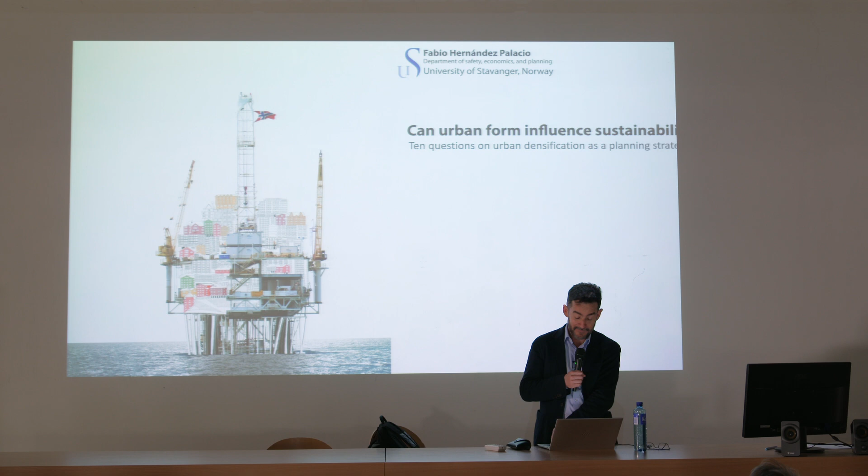So I want to address these 10 points. Of course, for architects, thinking in the large scale, the scale of the cities, sometimes some architects just work in the architectural scale and they do not reflect on the larger scale and the challenges that the urban form creates for societies. But other architects like myself, I moved gradually from architecture to urbanism. And urban form, of course, is something that I discovered is very influential and very crucial for the quality of life and for the sustainability of societies. And one of the most well-established approaches to address the sustainable city is this policy called urban densification.

Then I would like to start by defining what is urban densification, then why urban densification, what can be the negative effects of urban densification, how do we arrive at sprawled urban regions, what are the costs of sprawl of these very spread cities, what are the common approaches to implementing densification strategies, what are the main barriers to effective densification strategy,

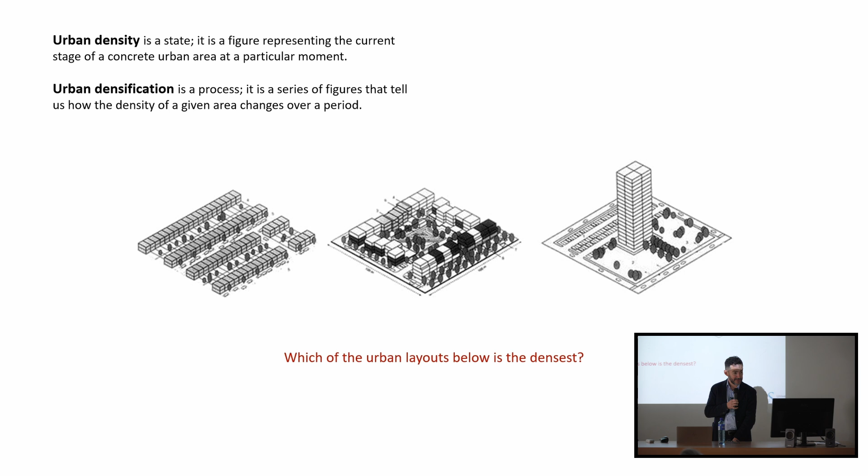Here, this is a question that I always put to my students. Of course, they are people who are starting in urban design, and they do not understand very well the concept of density. And then the question is, of course, which of those urban layouts is the densest? And of course, you know the answer because you are familiar. But people tend to relate high density with high rise, which is not the case. And then it creates many problems and many miscommunications and many challenges for city planners. But the point here is that all of those three layouts have exactly the same density.

And then I also want to call attention to the difference between the word densification, which is the process of making cities more dense, and the term density, which is a measurement. So like here, there are many measurements of density. One very common is people per area or dwellings per hectare or whatever area we have.

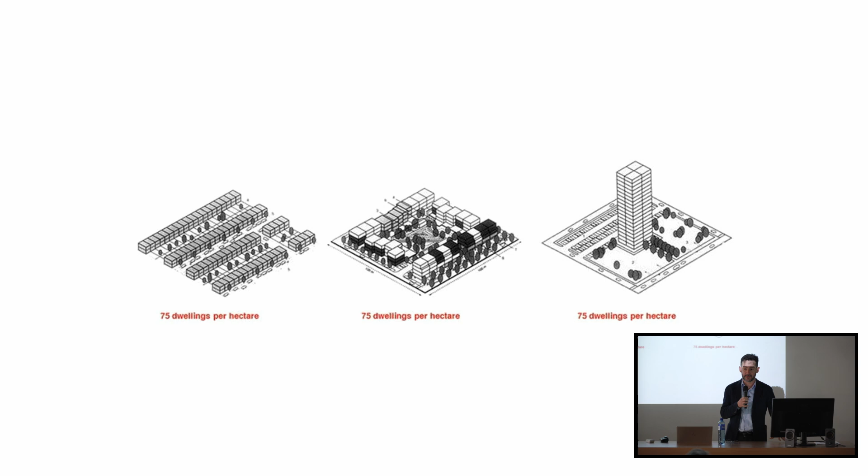And of course, concentrating activities and infrastructures can be achieved in two ways. The first is by building more in the same area, and the second is by concentrating more people on the same land surface. Densification occurs more frequently by combining both larger built surfaces to support greater concentration of people and activities. But how to understand that? We have concentration of people, but also we have concentration of built stocks.

A very common exercise: if you go back in history in Krakow, probably you will discover that 200 or 300 years ago, the amount of people living in the old town of Krakow was probably 2 or 3 times larger than today, because families were larger, they used to live more crowded, but now people have more spacious apartments and so on. So the built density is the same, but the amount of people living in those areas is less. So there are those double aspects of density.

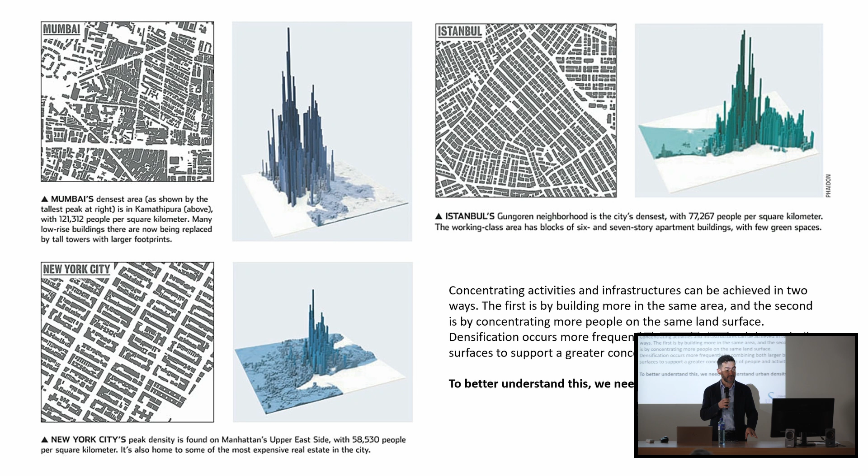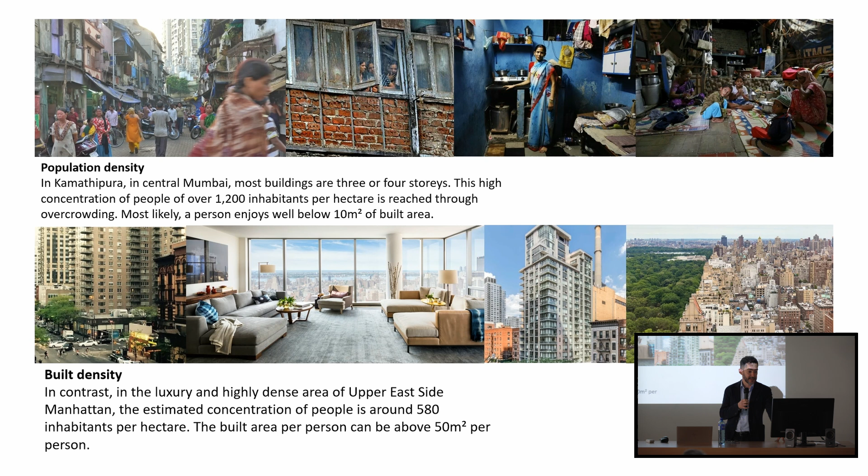So here I bring two examples, because people misinterpret both ideas of the concentration of built stock and the concentration of people. For instance, this neighborhood in Mumbai, Kamathipura, is one of the densest areas in India, and it concentrates around 1,200 inhabitants per hectare. And people just enjoy about 10 square meters per person of roof area.

On the other side, we have very luxurious apartments in Manhattan with, of course, also very high density, but people enjoy their 50 square meters of built area per person. And the density is, of course, about half, 580 inhabitants per hectare.

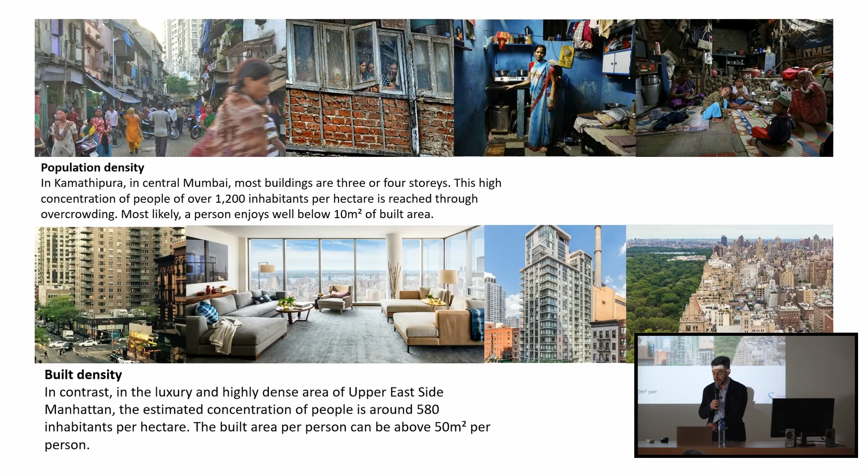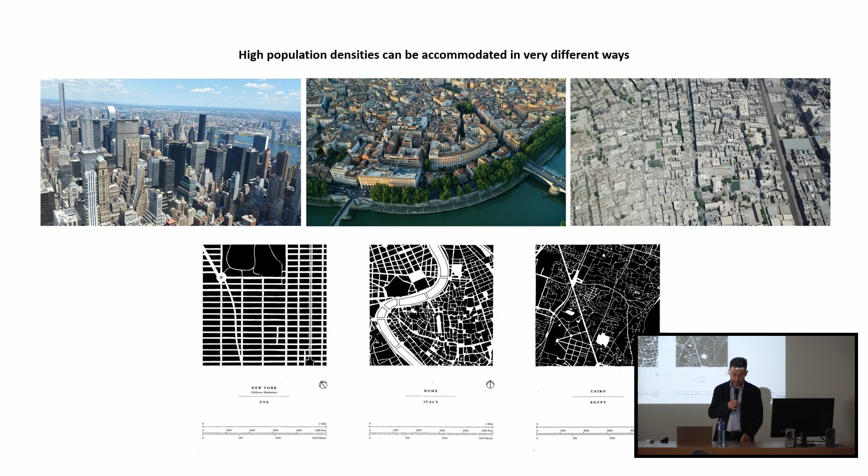One of the concerns as well is that density is a factor that can impact quality of life, and indeed, density can be problematic, especially very high densities. However, we urban designers defend the idea that it is possible to accommodate quite high densities with good quality. So it is a question of design.

So we have also the question of how much density is good. Is there a threshold in which we can say there is a good density and beyond that is problematic, or below that is too little? And of course, it's not really a clear standard. It's kind of a threshold, and of course, it's very much cultural as well.

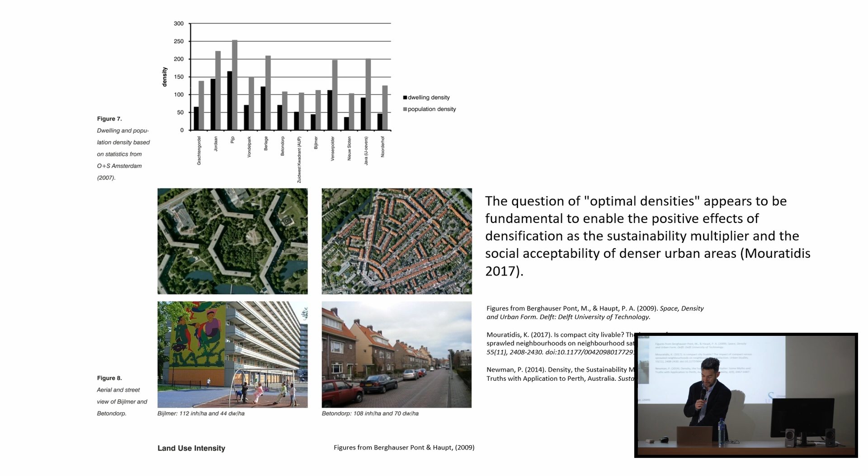So now we go to the second one: why urban densification? Well, the question about urban densification actually started in the late 1980s with this study. This is a study by Newman and Kenworthy in 1989. Those are some Australian transport planners.

And this became very famous because they made a global comparison measuring the amount of gasoline or fuel per capita and compared that with urban density. And of course, they found that very high density cities like Hong Kong were very efficient in the use of fuel. They don't need much fuel because people can walk everywhere, or they can use the metro. But in the other extreme is Houston in Texas, where people need to use the car to go everywhere because the city is very, very sprawl.

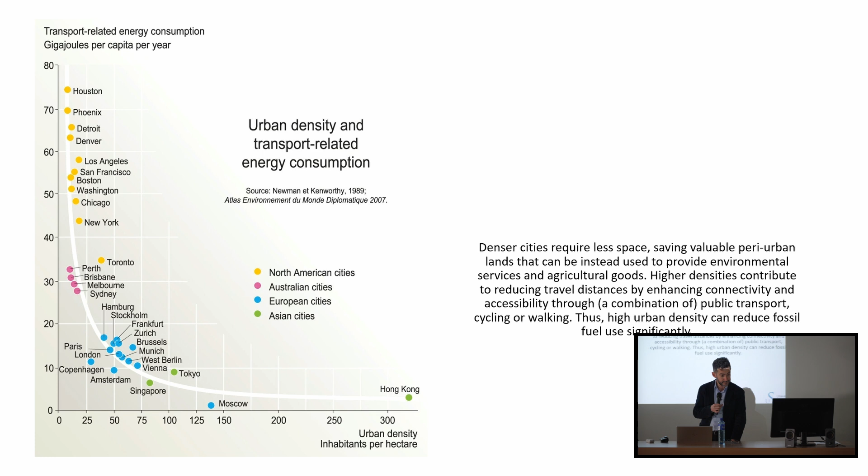So from this study, a very powerful movement starts to plan for more compact cities. And probably you are familiar with a lot of literature and studies, especially in the 1990s and early 2000s, about the compact city. And of course, it has been an issue not only in Norway, also in the Nordics, in Europe and beyond.

So how to reduce CO2 emissions—compact cities and more compact buildings also require less energy for cooling and heating because they have less exposed surfaces. Dwellings also tend to be smaller, meaning lower energy consumption, easier to provide by renewable sources. Also, another benefit from densification is avoiding the expansion of urban development on agricultural lands. That is very important, especially in countries like Norway, in which only 2% of the land surface is suitable for agriculture.

And of course, there are many economic reasons to think that density is good. Dense urban environments provide the conditions to reduce and improve supply chain coordination, leading to better logistic distribution of goods and services—services like post, delivering food to supermarkets, to grocery shops, collecting trash, etc., in a more effective way. Concentrating the users leads to optimization of the use of infrastructure such as electricity grids, water pipes, and street networks. Thus, operating services is cheaper.

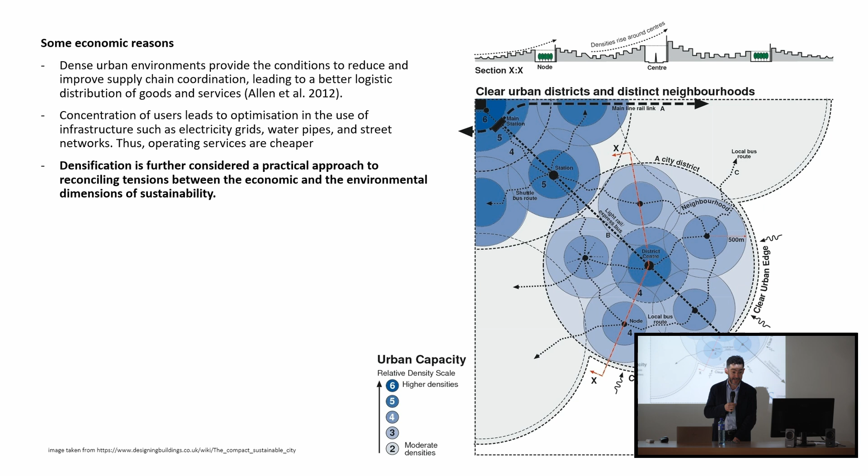Some social reasons for densification and for density are: compact cities contribute to a vibrant public realm. Some people find that problematic because they find the areas noisy sometimes. But also concentrating people and activities enhances the possibilities to access diverse and affordable services within shorter distances. So probably you are familiar with the concept of the 15-minute cities—that's only possible to do in compact areas.

Denser built environments improve creativity and innovation by attracting human talent to regions where they can access an exciting urban life atmosphere. You're probably familiar with the work of an academic urbanist called Richard Florida, who writes about the creative class city. He maintains that compact urban environments in the United States attract younger people, more talent, because these people enjoy urban life more, and thus it is possible to enhance the creativity of cities with these types of environments.

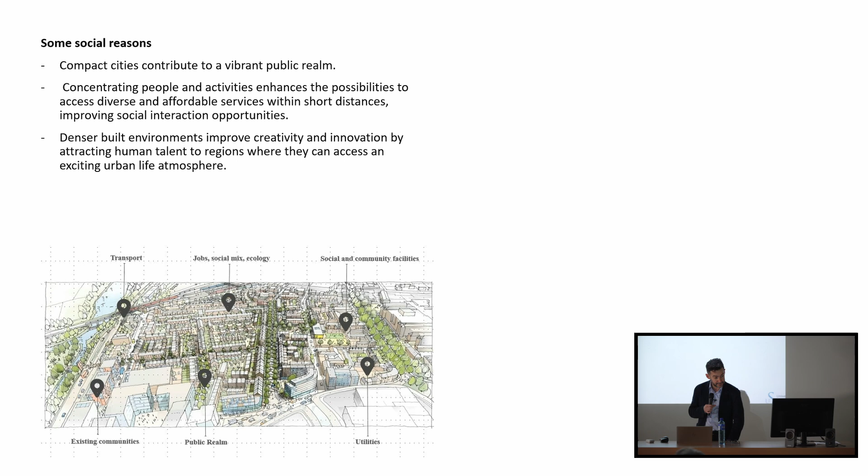So the question is, if this is so good, why are there so many sprawled cities? Why are we building cities in the way we are doing that?

I will try to answer that by going to my next point: what can be the negative effects of over-densification? So this is one part of the story.

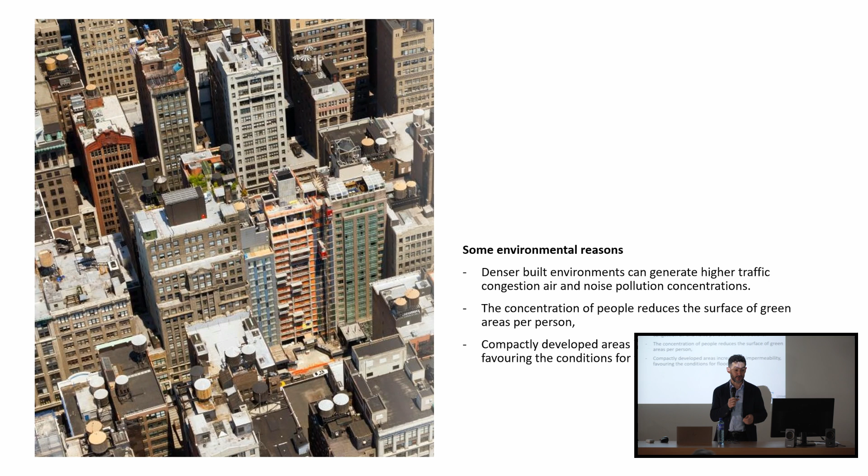Having too much high density can also be problematic. There are some environmental reasons why people don't like to live in very dense urban environments. Denser built environments can generate higher traffic congestion, air and noise pollution concentrations in a given area. Also, the concentration of people reduces the surface of green area per person. And compactly developed areas increase soil impermeability, favoring the conditions for flooding.

Those are just three examples from an environmental perspective. There are also social reasons why people are skeptical of very compact urban areas. High densities can be unpopular, especially among families with children and in affluent societies. People have the idea that children have a better quality of life if they live in a big house with a green area around, despite parents having to transport them from A to B, and children not having the freedom to move outside the house without parents escorting them wherever they want to go.

Also, social conflicts are more frequent in crowded urban areas. Noise and forced proximity with relatives and strangers are a source of discomfort and stress that can lead to violence. And crowded areas enable the spread of diseases, something we learned very well during the COVID crisis, when we were asked to keep a distance. This is not the first time it has happened. However, we still like density because it has also many other benefits, as I described earlier.

And some economic reasons for and against density: dense urban environments can increase traffic congestion, leading to a decline in overall productivity in some cities, or at least that's what some people claim. Also, pollution and congestion can make urban areas less attractive, specifically for high quality human talent. And dense urban areas that cannot grow can lead to high property prices if they cannot expand, so people with less means cannot afford to live in those central areas, which can be negative for the economy.

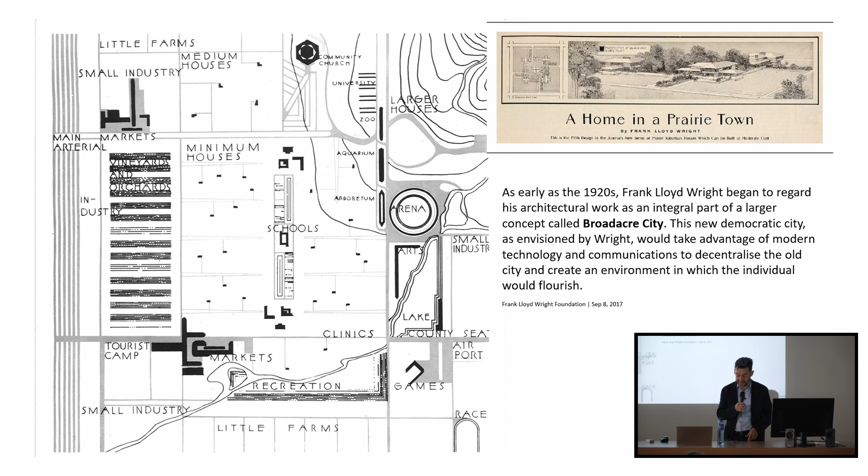Then planners in the periphery of cities realized very early that cars were very problematic, especially for children or elderly people, because accidents were very common. So they came up with this idea of designing an urban area in which cars could be separated from people. The streets that used to be the space for all types of mobility, cars, animals, people, became only the realm of cars.

In this layout, cars access from the back of the houses, and the front of the houses is entered from pedestrian paths in green areas. This created a totally new approach to the urban block. We see this type of urban design as very modern, but it's almost 100 years old.

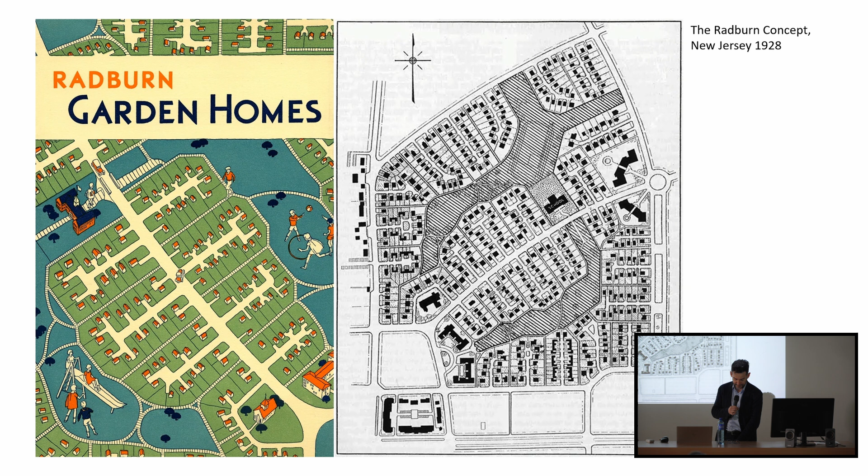The other part of this phenomenon, how we arrived at these sprawl cities, is that the car industry declared a war on public transport worldwide. That sounds like one of those sinister conspiracy theories, but it indeed happened. In this presentation I have a link to a documentary called Taken for a Ride, the story of the big car industries in the United States that decided to make a big fund of money to buy the operators of public transport in many large American cities, like Los Angeles and elsewhere.

So they bought all the tram systems, the railway systems, and just let them rot, in order to sell buses and cars. They did that in many other places around the world by different means, helping to dismantle collective transport in order to sell cars. It was proven, they went to trial, and had to pay some fines, and things of course continued from there, but the impact on cities was tremendous.

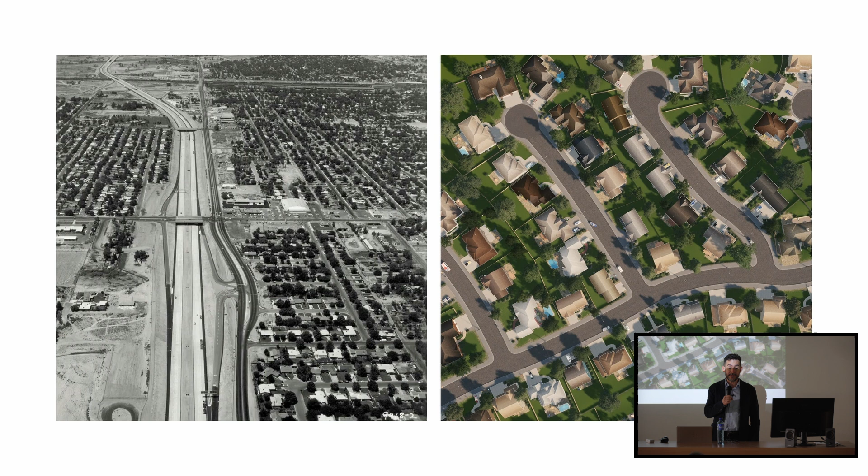So we arrived at this type of landscape, which we see in the periphery of many affluent cities, as is the case now in Poland. Today, defining the border of a city is very problematic, because of course cities are based on transport.

So we come to this definition of the functional urban region, which has been adopted by the European Union and the OECD. They define an urban functional region as an agglomeration in which you are able to commute, meaning travel, every morning within 1 hour. Going 1 hour by car from here, from Krakow, you can reach many other small towns, and in a way, those towns are part of the same urban phenomenon.

That creates many other challenges, because there are often many different municipalities, since municipalities come from older times when communities were very local and had concentrated problems. But now those problems of transport and providing services are regional problems.

This is a new, contemporary problem for planning: we do not have the institutions to properly plan those cities. You probably experience that situation often here in Krakow as well, where one municipality has different plans that don't match the neighboring municipality, with no dialogue or consultation between them, creating many problems, especially for the provision of transport or larger regional infrastructure.

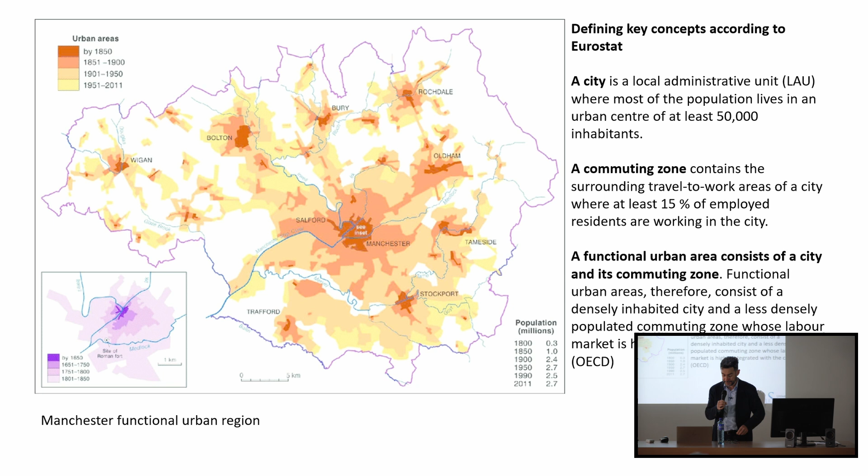Poland is a large country with relatively small population for the area. So you are not in the situation, let's say, of the Netherlands, for example, which is a very tiny country in which they have to be very careful in how they dispose land uses. Here you have the luxury of having a lot of land and probably also land of high agricultural quality. So cities can easily sprawl over the agricultural barrier without creating much problems for the economy of the country.

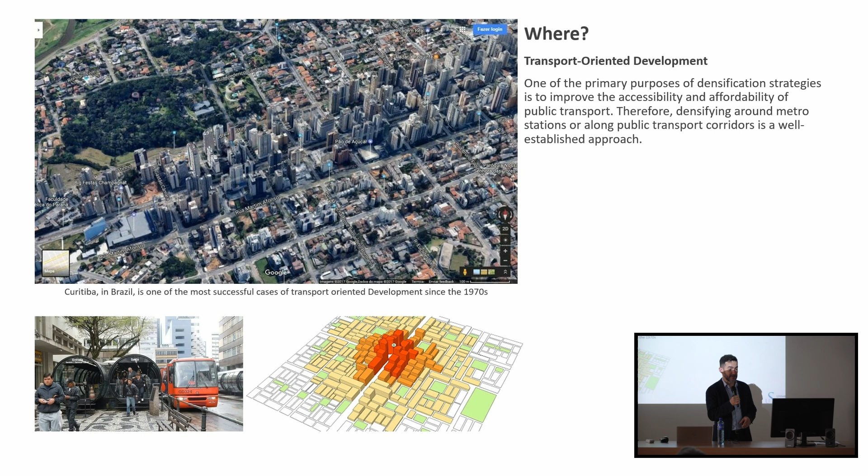And later on, this inspired many other developments. I mean, probably you are familiar with this concept in many other places. Policies to increase density around railroads and bus stops, etc., in many other places. And this idea of implementing this rapid bus approach has been proved in many different areas with different degrees of success.

So what are the main barriers to achieve effective densification strategies? Well, I would say that the main barrier is that we already have large parts of our cities built in this way. So changing this type of pattern will be very problematic. I mean, imagine you are a family that already bought your house there, you invest in a mortgage for probably 20, 30 years, you are going to live all your life there. So changing that will take decades, if it can be changed. So the main problem is that we already built our cities in this way.

And this first one is an economic problem. The second one is regulatory. So as I mentioned, since those cities sprawl beyond municipal boundaries, having this coordination between municipalities is very problematic. And it is very problematic because we have a system in which municipalities compete by taxing land property. In very few exceptions, land property taxes are collected nationally. And I would say that's the case in the Netherlands.

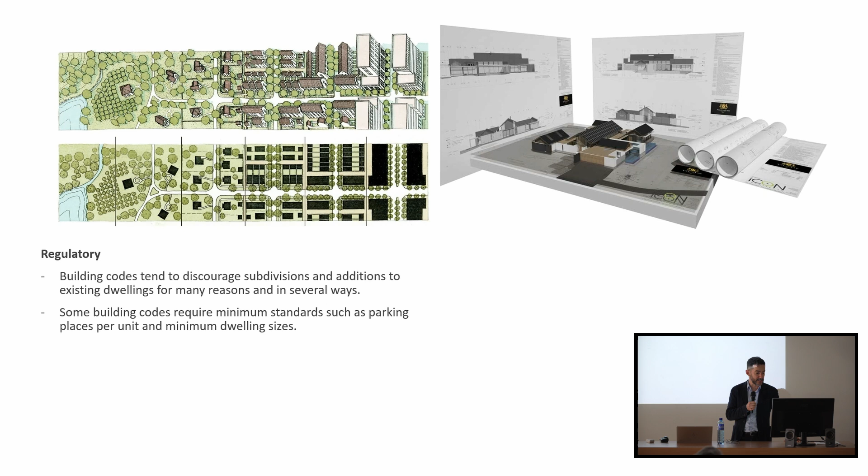Among the social challenges: in many contexts, high density has a negative connotation and indeed can be of very poor quality. The other negative aspect is when we manage to achieve good densification. I think it's something probably happening here in Krakow, that some of the areas in the center of Krakow had been somehow run down, but suddenly they became successful areas for tourists, for businesses, or for hipsters, young people with good incomes. So they manage to build and buy in, and they start to displace the local population, and this is the phenomenon called gentrification. So this is another problem associated with those policies when they are successful in a way.

So the eighth question is how denser built environments can contribute to urban quality. Well, the first thing we need to do is, of course, to define urban quality. Let us refer to urban quality as a set of characteristics that make a place comfortable and desirable for living. It means that houses have a good standard of living in aspects as essential as the area per person, so you are not very crowded. They have good access to natural light and ventilation and safe building materials. The neighborhood enjoys good access to urban services, grocery shops, schools, and other communal facilities. You can also enjoy various green areas and public spaces accessible within walkable distances, and pollution levels, including noise, are low, especially at night. With good design, it is possible to achieve those things, even in high density environments.

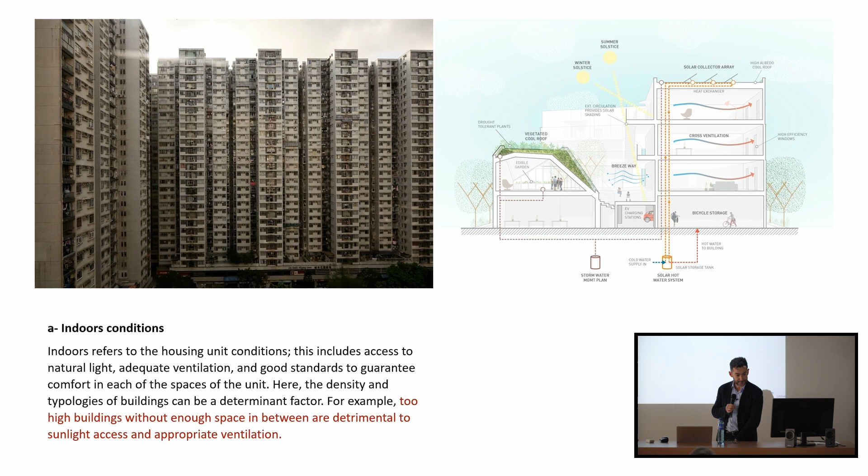And we can have, of course, very poor quality density, but we can have also good standards of high quality conditions in high densities, as an early example I showed about Manhattan, or the example in Mumbai in India. So it is a question of design.

So the size and proportion of each room should be large enough to accommodate adequate furniture and a range of potential users. So if we want to achieve high quality density, we need to avoid designing very small units that cannot even fit the proper furniture that we need for everyday life.

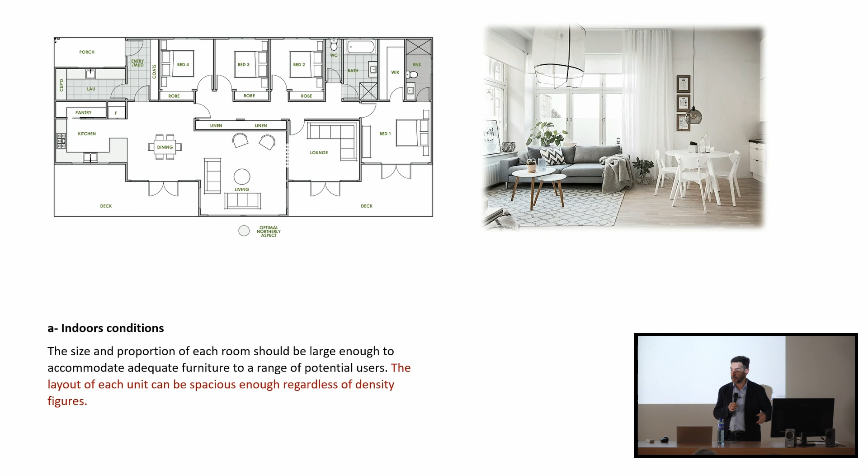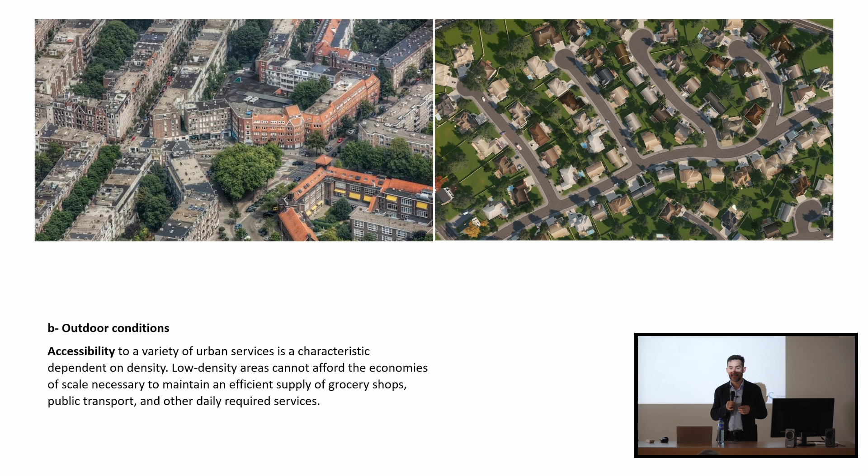And also we need to take care of high quality outdoor conditions, especially to provide good accessibility and the provision of services in the vicinity of the developments. So it means combining different functions in different buildings so that people can have the possibility to access the services they need in the proximity where they live.

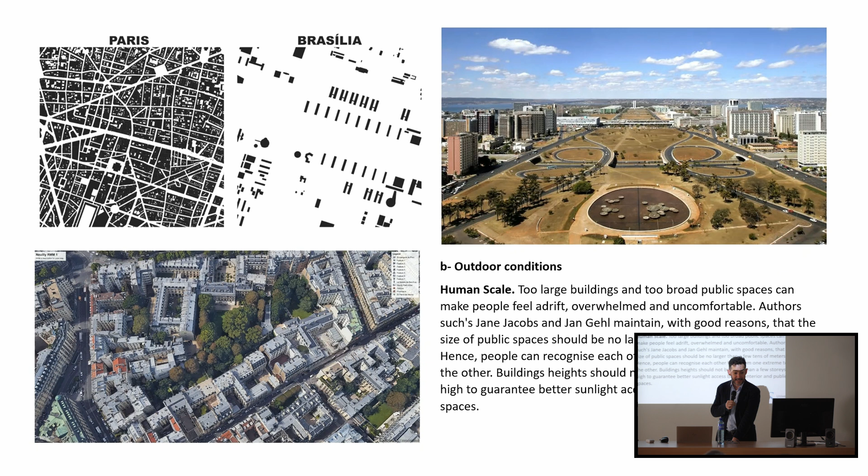They can be also green, and still it is possible to combine with relatively high density. For me, probably the most interesting case, probably some of you have been in Berlin, which has those large blocks with green hearts and quite high density and still a lot of greenery, and offers those wonderful conditions of multifunctional buildings with active ground floors, multi-story apartments, offices, and a highly active public realm.

Well, this is very quick. How is the situation in Norway? Just for you to have a general idea. As I mentioned, those densification strategies in Norway have been happening since 1987. And they started because municipalities became aware that providing services to these very low density environments was very costly for them.

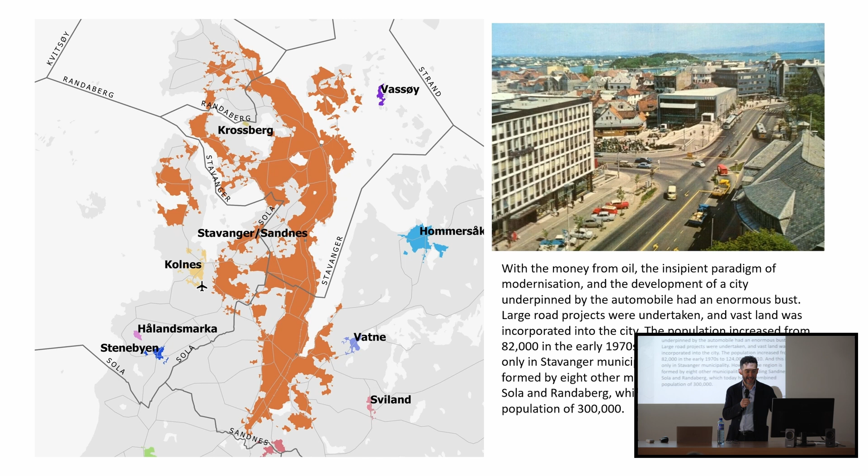And then suddenly the city started, of course, it was in the 70s when we have all this modernization strategy, all the enthusiasm by cars and modernistic buildings and so on. So they start adding gradually large buildings and building roads. And the city expand, and you see here in this island, it's difficult for me to show here, but somewhere here, the old part is over there, and the periphery is all of this, and you can see the difference in densities there. So the city grow lower and lower densities.

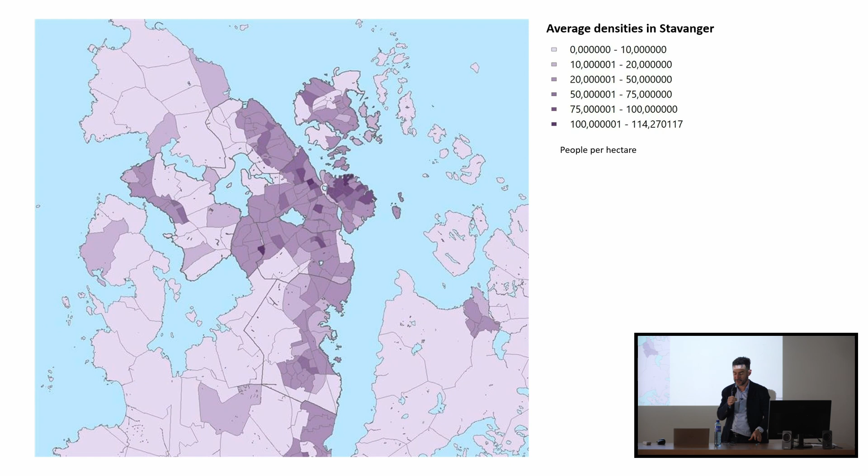But recently, they have introduced urban tolls. So every time that you have to use your car, you want to enter the center of those 4 or 5 municipalities, you have to pay. You have to pay like, how much is that? I think it's like around 10 zlotys. So every time your plate appears in the camera, you have to pay. So this is a way of incentivizing densification because people don't want to pay much. So it's an additional cost on living. So this gradually is helping the city to become denser.

Also, they introduced this 4 zoning area in which they prioritize development in the zone A, so meaning in the center area, and in some other corridors close to the rapid bus corridor, and then the area C and D are the less privileged areas for developing permissions.

And they came with this crazy idea of developing this bus corridor between the center of Stavanger, which is there in the north part, and another center here, more in the south, which is another city. There are like two larger cities there. Stavanger is around 150,000 inhabitants, and the other city, called Sandnes, is probably around 100,000. So all is urbanized, and they develop this bus corridor connecting them.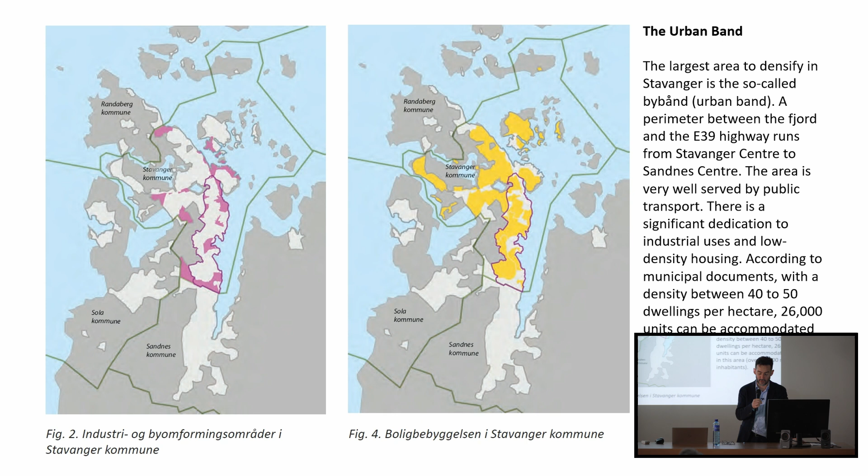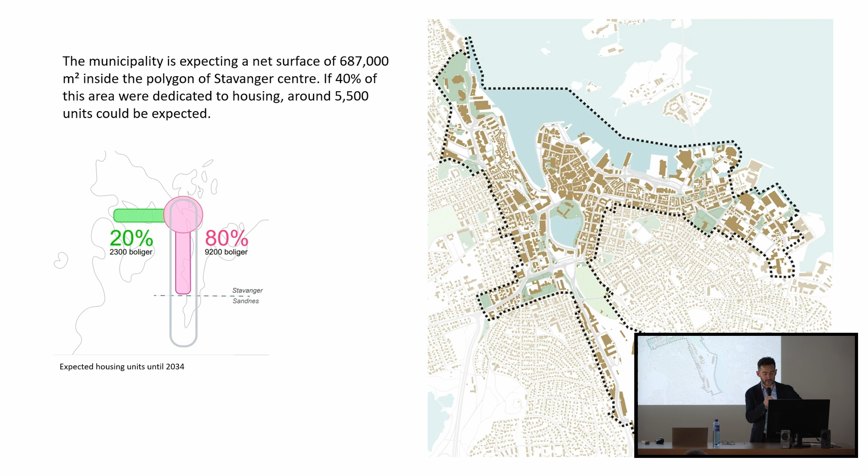It is the line that you see in the perimeter, and they are privileging the development around that area, so they are expecting that the future urban development happen in that corridor. So they expect that 80% of the dwellings can be built in this central area, and some other 20% can be in another corridor towards the west.

But they have many challenges, and of course, you are not familiar with that, but there was an oil crisis like 10 years ago, and many companies had to put in the street many workers, and many immigrants, especially people working in the oil industry, many of them are foreigners, and then land prices went down very quick, and even some years, 2015, 2016, 2017, the city, instead of growing, lost population. They lost 200, 700, 600 people. Still now the city is growing a little bit, but very flat.

So the question is, you need to densify cities, you need to have growth, and you most likely need to attract new people, or you need to demolish houses, something that has happened in some areas. I know that has happened in some areas in Germany, like in Leipzig. They have a tremendous degrowth phenomenon. They managed to accommodate people from the periphery to the center. But that's a very complex situation. So basically, to have a successful densification strategy, the better is to have a population growth.

So the question is, how does Polish cities planning face sustainability challenges? So this is what we are doing in Norway, and I would like to know more what is happening in Polish cities. Thank you for your attention.